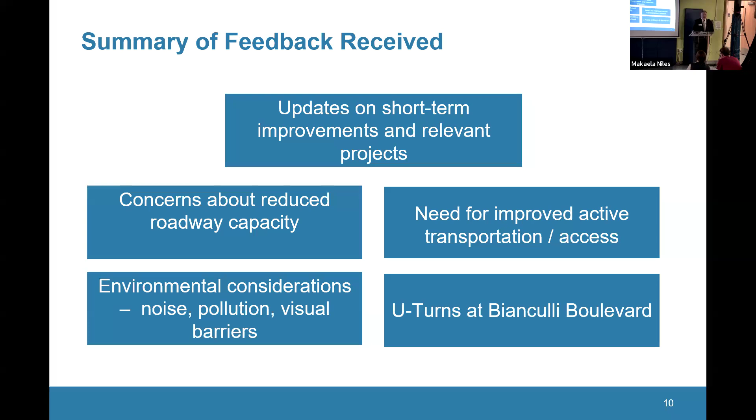So transitioning to setting the table for what our meeting today is going to be, and also how we're going to go from this meeting to the end of our process. For today's meeting, we're going to again talk a bit about short-term improvements and relevant projects, but primarily we're going to look at the initial alternatives analysis. We're calling it initial, preliminary—it's not complete, but we want to bring it to the public and commission members to present and hear feedback.

We also have environmental considerations in terms of the analysis. Then after this meeting, we have a follow-on meeting where we take feedback, complete our analysis, and bring back the final analysis. With that final analysis, we're able to look at what our findings are, potential recommendations, depending on how the remainder of the public process goes. And then our final step is to have some type of packaged final report, which can be submitted to the legislature per the commission's charge.

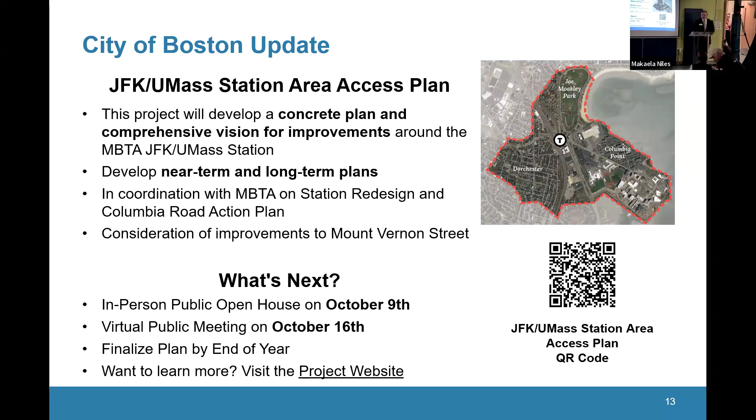The city is conducting this, and they have an open house October 9th, and a virtual public meeting on the 16th. We include these because we understand that while they're separate processes, they certainly need to be connected, coordinated, and ultimately as part of project development, all need to work together. So part of our study process is to track, keep track, coordinate, and document, so that as anything moves forward, all of these different relevant projects are in the same mix and can be done comprehensively.

So they're obviously, as we've been saying, in a project development process, and they're ahead of where we are. They have their own project development process, which is a required way to go and do things—go out to the public, certain design phases. So they do have steps they have to take. They are doing all this background work before they come to the public in general and speak to them. And the Beades Bridge is similar.

It is in a preliminary concept design phase, but unlike K Circle Columbia Road, we do include Beades in our concepts, and we are going to inform the Beades process in the future.

From the DCR side, some of this work was already underway, but some of it has been in response to public comments we've received, either by email or from people coming to the meetings.

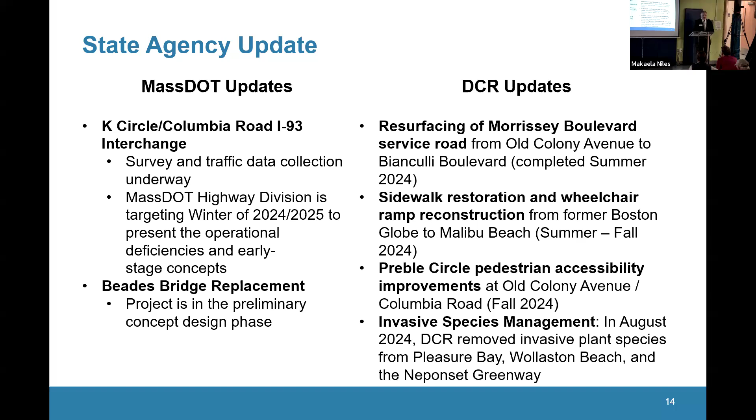We understand that a lot of our process here is going to take time, so we really try to identify immediate things that can be done, often in response to what we hear at these meetings. This is a very standard part of our process.

Now, this is another DCR project. They're looking at a pump station to prevent flooding on Morrissey from Conley to McKone to Market Place. There's an existing drainage outfall pipe, and this emergency pumping is required, so this pump station is going to help with flooding throughout the area. They'll look to complete it in 2024 and 2025, so this hopefully will do a lot for the flooding in the short and medium term.

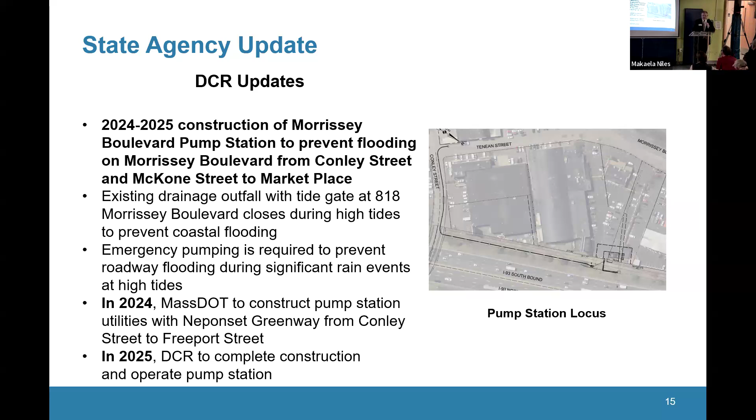Okay, so that was just an update on the immediate and relevant projects going on in the area. This next part of the presentation we're calling the corridor layouts. It's primarily based on our alternatives development process, but wrapped around it is the public involvement process we've been conducting from the beginning. So these layouts we've developed involve a study process, but also public feedback wrapped around it.

We had been showing in prior meetings the individualized locations, but this part of the presentation is going to be stitching together those locations into a more cohesive corridor. If you had seen them on the wall, that's what we are going to be showing again in pieces, because it's too long to show in an entire slide.

So here's our overview of the corridor very quickly. The intersections are obviously the ones we focus on from the beginning because they are the conflict points, the friction points, the turning movement points.

We developed a layout based on our process, but also feedback, that has one option for Neponset Circle. We have two options for Freeport Street, one for Bianculli, two for First Street, and one for Preble. That's not to say we didn't develop more alternatives - those are in the evaluation - but for putting together a layout like this, we wanted to pick and choose a few of them to be able to lay out the corridor in this way.

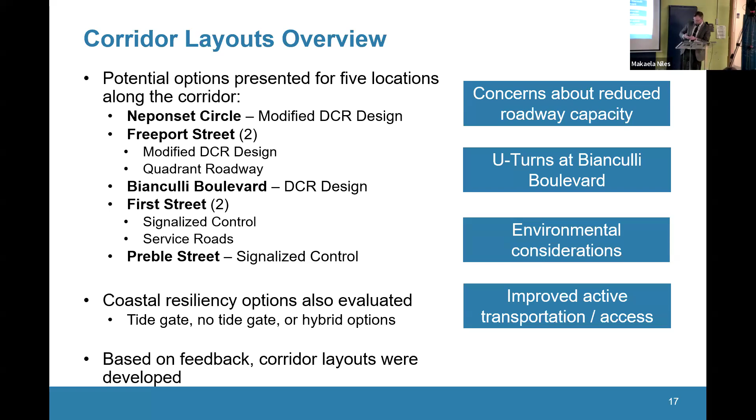Thanks, Ethan. Thanks, Ethan. We're going to start here. Sorry, Ethan, which way's forward?

We're going to start for once at the southern end of the corridor, recognizing the last couple times we've tried from the north and haven't gotten past Bianculli. So we wanted to start at Neponset, which is the southern terminus of the project area, a very complex intersection - it's really a combination of four or five or six. What we wanted to highlight here, you'll see an orange transparent rectangle.

Just to orient everyone, north's to the right, it's going to be to the right on this whole sequence of maps. On the left there, that's Neponset Avenue, and then Morrissey Boulevard continues off to the north towards our right.

So I want to draw your attention to that orange area. That orange area is a big contributor to the congestion Neponset Circle experiences, as well as crash incidences, due to the fact that it has so many different movements all coming together and weaving apart. I'll just step away from the mic for a second to illustrate some of those.

Get on the heavily traveled 93 northbound on-ramp. So we have people coming northbound from Neponset Avenue trying to get to the heavily traveled I-93 northbound on-ramp. At the same time, we have people coming from Quincy, Neponset, trying to get north on Morrissey Boulevard. It creates a real mess.

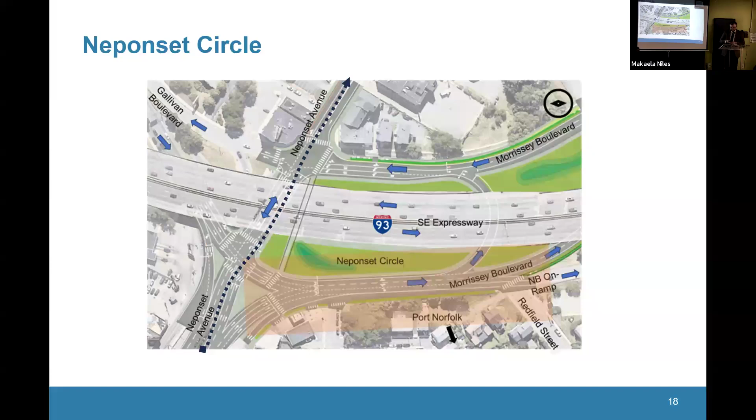Going to continue a little bit to the north. This is the segment essentially between Neponset Circle and Pope's Hill Circle.

First thing I'd like to draw attention to is the roadway here, and for folks more interested in detail, there are some typical sections. This is the first time we're really introducing the roadway reconfiguration, where we're proposing to reduce the number of through lanes on Morrissey Boulevard from 3 to 2, essentially throughout the corridor. As we head north from Neponset Circle, that's where we start to pick up that cross section.

We've identified a median area near the I-93 off-ramp as a really good opportunity for a stormwater detention infiltration facility. In this southern part of the corridor, the flooding we experience is actually more from stormwater flooding than sea level rise or water coming from the ocean. So the more we can do to delay the amount of water that gets to our stormwater infrastructure by letting it infiltrate, by having basins that hold it, the more it will help us in this urban corridor.

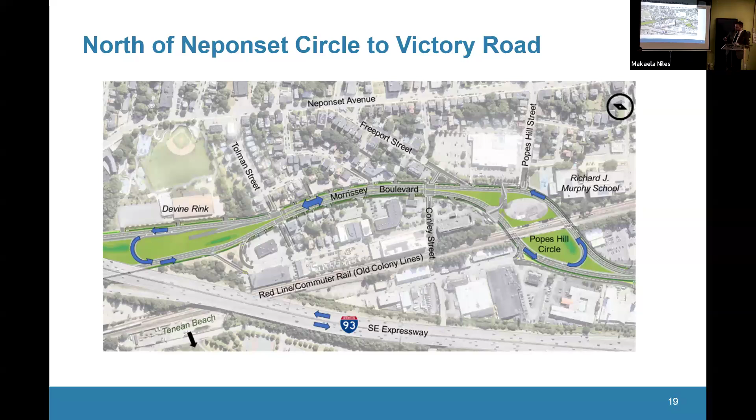As we continue to the north, I want to focus for a moment on this intersection complex at Victory Road and Freeport Street. As we're getting towards that I-93 bottleneck, we have a 93 off-ramp, another 93 off-ramp, and a 93 on-ramp. These destinations and attractors are bringing additional trips through this area, in addition to the geometric bottleneck we've got with the I-93 underpass. So it's a challenging situation.

There's a lot of traffic volumes to deal with. One of the ways we've talked about addressing this throughout the project is by simplifying these intersections. We're asking these intersections to do a lot by handling all the movements at one place. So our ideas at Freeport Street consolidate around reducing the number of movements.

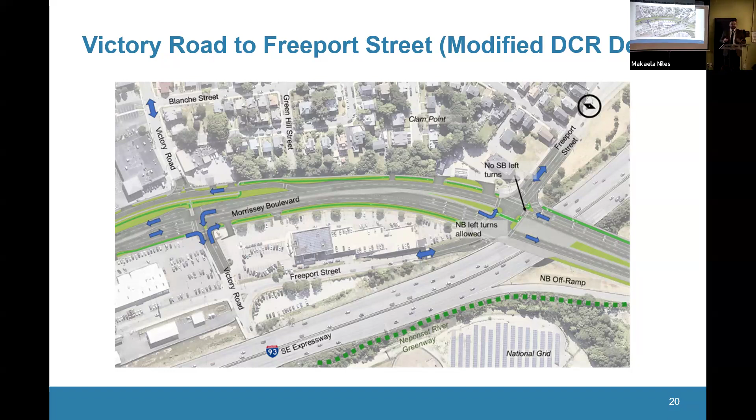The first alternative we looked at essentially moves southbound left turns down to Victory Road. By eliminating that one major movement and relocating it down the road, it enables that intersection to operate a lot more efficiently. We have a second alternative, depicted here, that adds on to that, called the quadrant roadway.

The difference here is, in addition to those southbound lefts being moved down, those northbound lefts are also moved to Victory Road, where they would then make a right and then a left on Freeport to continue through the intersection. So the quadrant roadway removes both of those left turns from the intersection.

We are still proceeding through some of the final steps of our VISSIM microsimulation analysis.

Based on those first meetings, we did decide to recommend eliminating the median U-turn alternative at this location. It occupied a lot more space, required a lot more impervious area, and I think some of the initial feedback we got was very negative to that effect.

As we consider how this Freeport intersection operates, we've also drawn our attention to the Victory Road intersection. There's a possibility to potentially eliminate this frontage road that currently acts to provide access to both Victory Road and the development plaza. We're looking at an alternative that could remove the service road, creating just one signalized intersection, so drivers would enter once to leave Morrissey Boulevard rather than having the frontage road with a series of right-in, right-out exits.

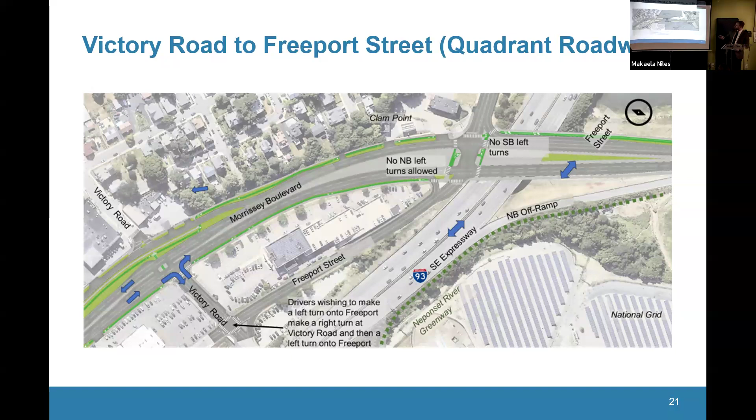Moving beyond 93 towards the important central section, you're probably thinking you haven't heard enough about coastal resilience yet. That's because in the southern section of the project, we've identified and coordinated with DCR, the city, and other important agencies and stakeholders to understand there are other projects responsible for protecting Dorchester and Morrissey Boulevard further south. But once we cross I-93, Morrissey Boulevard really is the first line of defense against coastal flooding and sea level rise. So that's our priority here.

We've identified essentially two primary decision points with a couple of different ramifications. The first is we can put a surge barrier on the Beades Bridge, basically a gate that we can close. If we elevate the Beades Bridge and raise Morrissey Boulevard, that would allow us to not raise or elevate parts of Malibu Beach around the back.

So what we could do is have a roadway profile that gets us as high as we need to be, but it could descend, which would help minimize construction costs and minimize construction duration. But it would leave you with a wall to your right as you headed north. We've developed three alternative profiles.

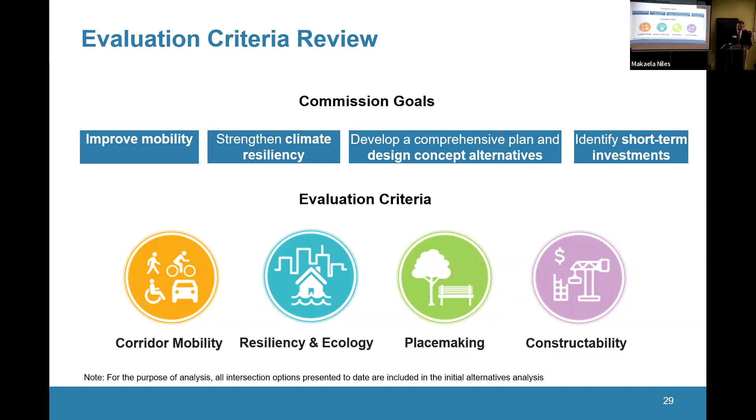So just transitioning to this slide here, these are what we commonly use for our evaluation criteria or metrics. It's just in a very bulleted form here, very succinct.

I have a bit more descriptors I'm going to rely on for some of these. For mobility, we look at delay at the intersection level, total hours of delay in the corridor, vehicle queuing, vehicle access to sites and entrances, and transit access—how easy it is to access certain points in the corridor for transit vehicles or those seeking to go to transit stations.

Pedestrian crossing comfort is pedestrian comfort at intersections generally, but there are also mid-block crossings in the corridor. Pedestrian gaps—we look to close any north, south, east, west gaps in the corridor. A way to look at bicycling is stress level, or level of comfort. The more bicyclists feel comfortable, the more they'll generally use it, so we have a measure of bicycle crossing stress.

Potential safety effects—we look at what types of treatments there are and whether there's an expectation of a safer environment. Resiliency and ecology—we want to look at impacts on environmental resources. I'll pause there because that's probably one of the more key aspects to getting a project done: environmental permitting.

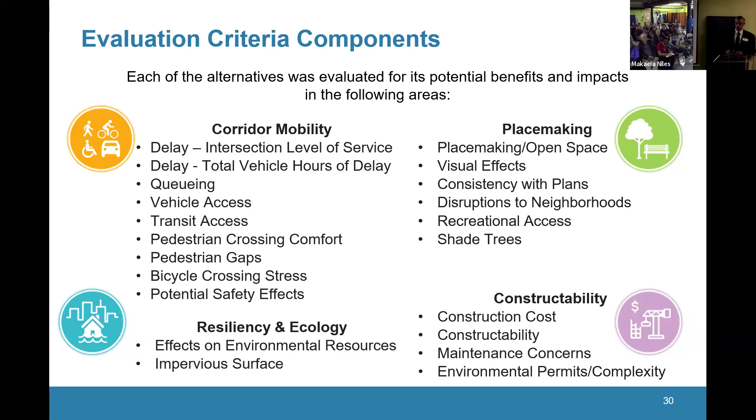But at this point, we're using this process, and we have the colored scale to give you a sense, a little bit more visual analysis in this case, to be able to understand where we are at with different alternatives at these locations.

And as we said before, for Neponset, we've already kind of decided based on the information we've collected and the work we've done. Also another key piece of this is public input—there may be things we need to look into more detail, or that folks in the neighborhood and community give us input, which is input we've gotten throughout the process. We take that, and you've seen some of the results of that and the work we've done since. So we'll continue to do that as we go through this process.

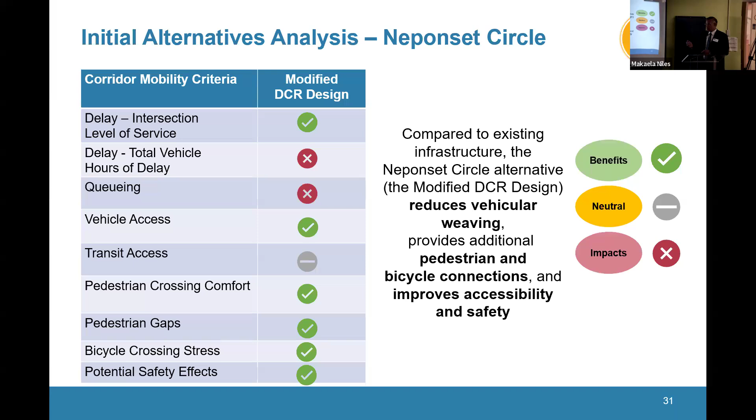Generally, for the mobility criteria, some are great, some are generally not as good. So that's how that rated.

In terms of some of these other criteria, the resiliency and ecology criteria—we aren't changing the impervious surface, actually we're reducing it a little bit. If there's anything at all we can hang our hats on, we're kind of going in that direction with it.

In terms of placemaking, in this case, this is a green check. This is a great opportunity. It really doesn't speak to the tremendous opportunity we have at this location to create much more of a human scale for the area under and around the infrastructure that's there.

Also the safety improvements from the steps we want to take there. That one really doesn't have much of a comparison.

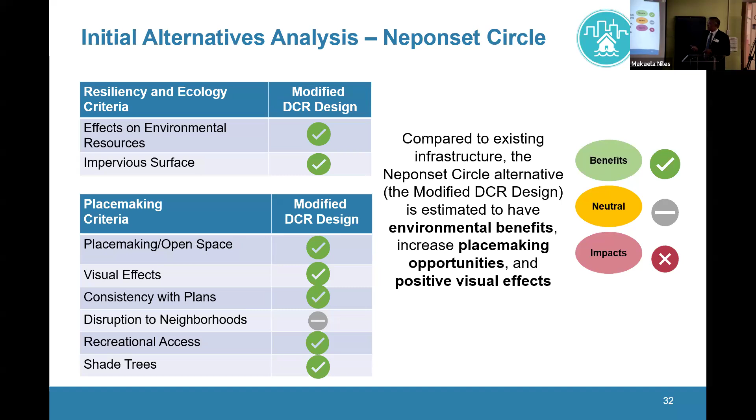The construction cost isn't huge because we are using mostly existing infrastructure, and constructability is the same kind of situation, because we really don't have a lot of disruption and we're not doing much. Maintenance is pretty much the same, and complexity is neutral because there are things we have to do and processes we have to go through, but basically it's not very significant because it's mostly the infrastructure that's already there.

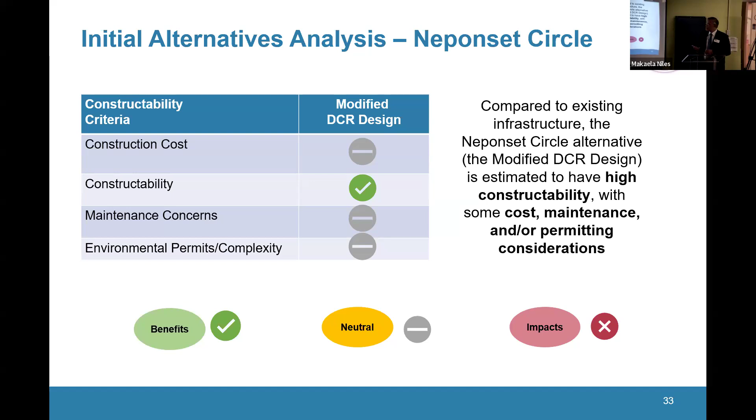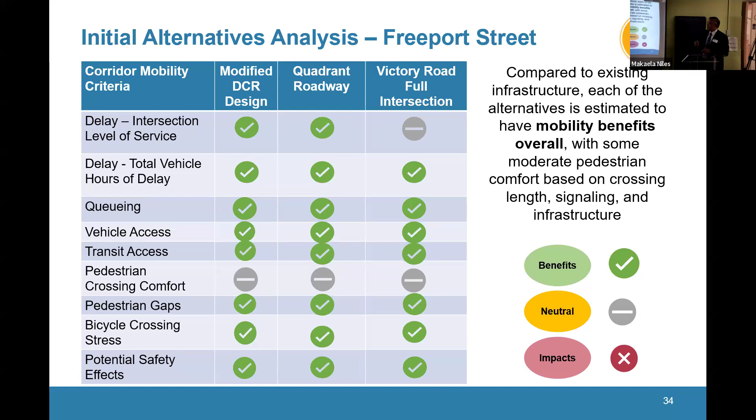Next, for Freeport Street, there wasn't a lot to really differentiate these too much in terms of mobility. You can see they rated pretty similarly, and it's a little unusual here because we don't have a lot of different components within this little piece of roadway. And we didn't have the other Victory option here yet.

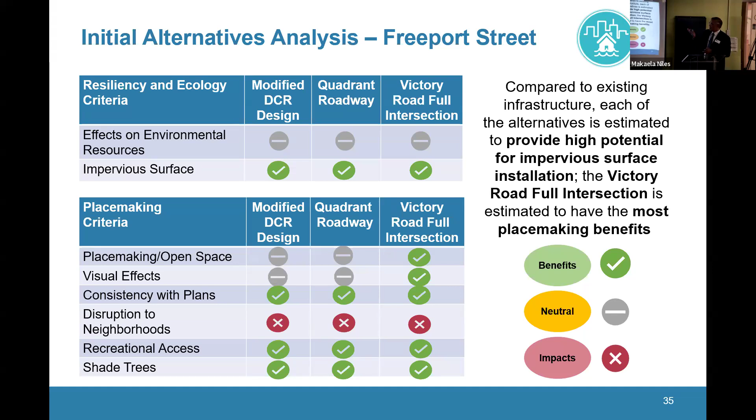But in terms of the resiliency, you can see how they are very similar. And in terms of placemaking criteria, Victory Road gives you a little bit more positive opportunity there, but for the most part they're pretty close in terms of the other two.

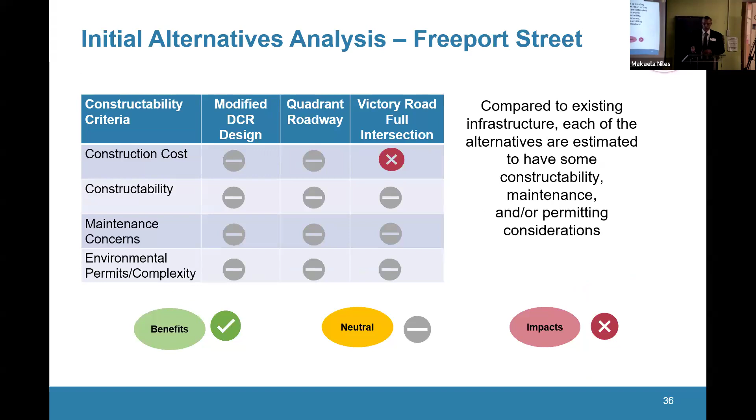And then constructability, obviously, because Victory Road full intersection completely disrupts the whole roadway, and we have to create a new intersection, whereas the others you're just realigning some of the infrastructure there. So that's obvious why that one would have the red X.

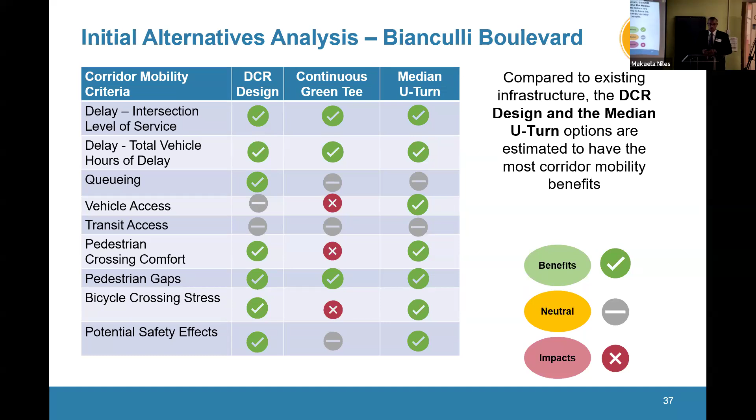In terms of Bianculli, we did have the different options here to show you comparison. But as you can see from our work here, we've already decided that the DCR design is probably the best in this situation. Here's the other criteria for resiliency and placemaking, all fairly similar in terms of the first two, but our analysis and the feedback and other things have led us to that one solution.

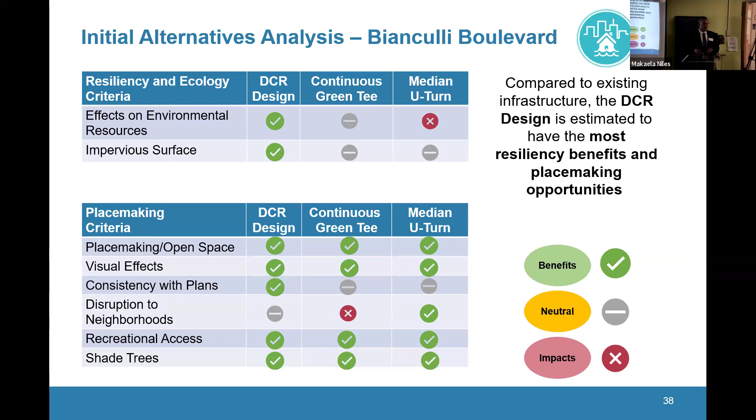So First Street, you saw there's different examples here. Obviously the big issue here with the difference between the two is signalized control. It's going to slow the traffic down - you have an intersection where you don't have one now. So the overall impact on the whole network is that you're going to have some negative impacts there, and that's reflected here.

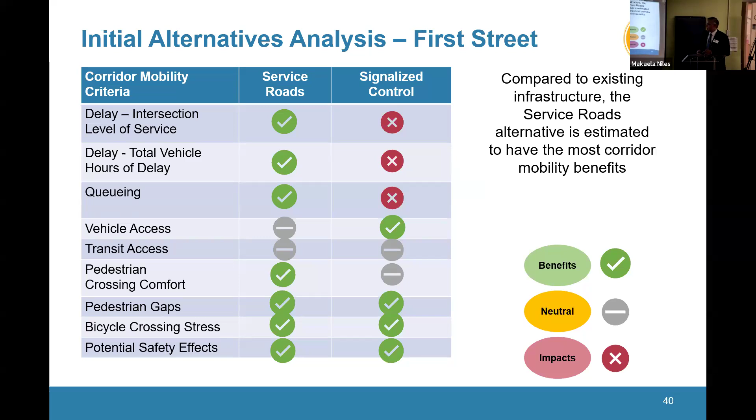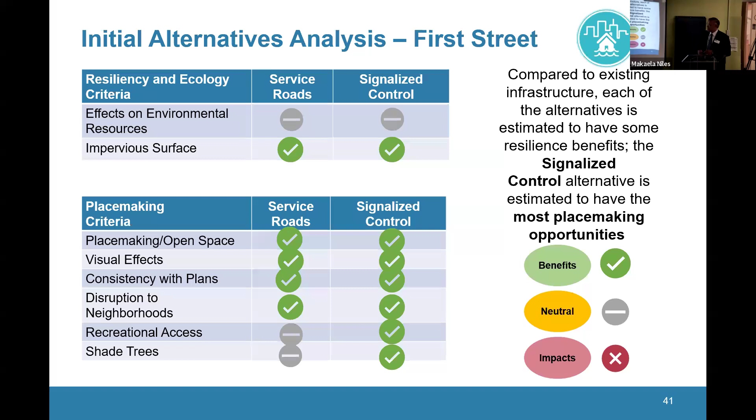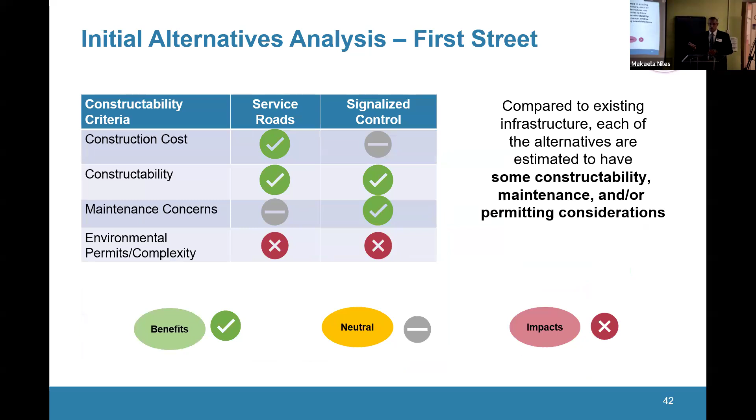Resiliency and ecology and placemaking generally, pretty close - there's nothing that really differentiates those significantly between each other. And then the constructability criteria, again, from environmental and permit complexity, there's a lot more construction, so it's going to rate out as well.

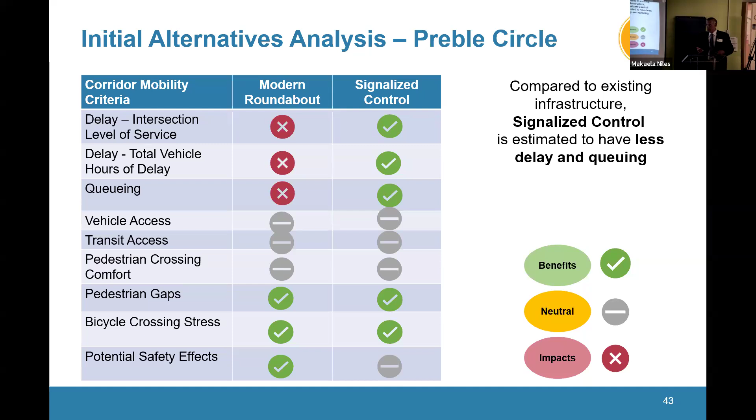Most of the other things rated about the same. But here on these two, you can see even though it's leaning towards the modern roundabout in some of these, we did, based on all the input and the technical analysis, lean towards the signalized control here.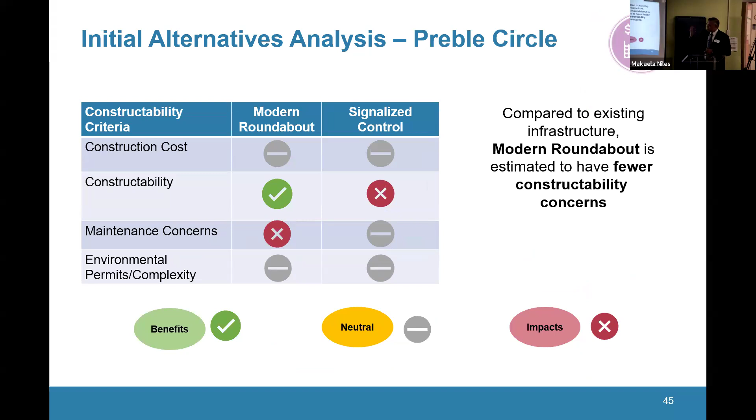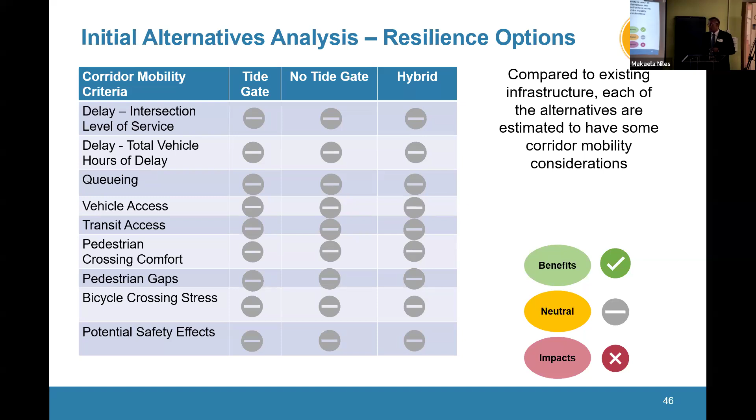And then constructability, here's our ratings, which, not a huge differentiation between the two. Resilience options, not a lot - I think Ethan talked about it a little bit, and it's not a lot driving you in this analysis here. They all kind of rate the same.

So I think we really need to dive more into it, get feedback on, think about how we're going to implement it, and the different options. It's hard to really understand what we're talking about, but basically, as Ethan said before, we're talking about different levels of the roadway and protection on both sides that may impact Malibu Beach, and it may impact constructability and cost savings. So those are the things that kind of might drive that more than anything.

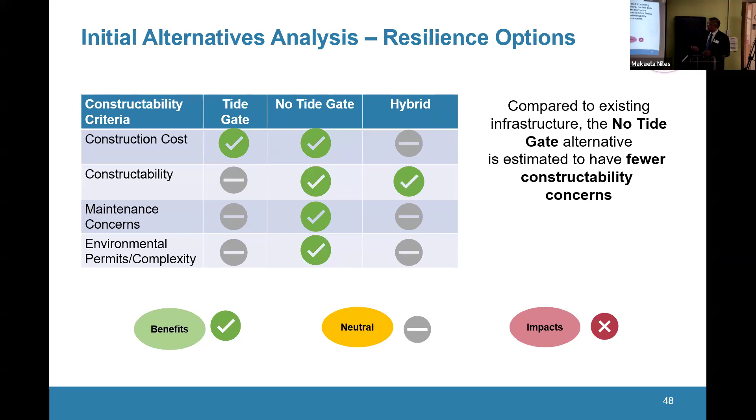But with that, that's just a really quick rundown - a lot of information and work went into that. I hope that was helpful. Again, we can talk about it more if there's any specific area you want to dive into, but I'm going to turn it over to Ethan, who's going to talk about the traffic analysis or the transportation modeling piece, which will be done for the whole corridor when we do decide what our recommendation will look like.

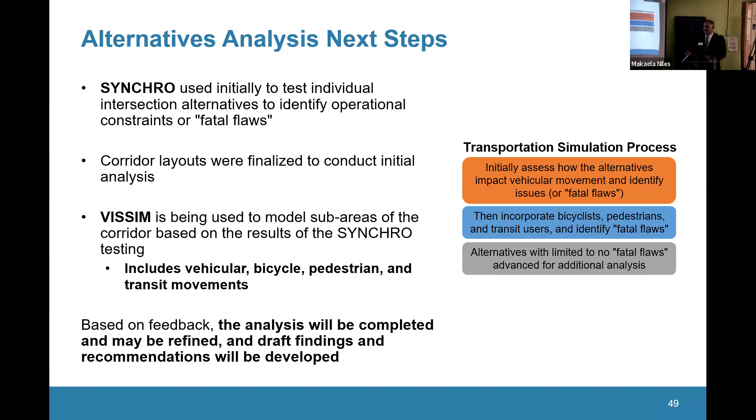This is the DCR design that we have shown, and this is the operation.

Both of these are, in theory, the year 2050. That's not to say when a project ties to that — we look at a horizon year out a certain time to make sure we incorporate future demographics, so any improvements we make actually last a certain amount of time. So this future scenario incorporates both future demographic and volume changes, but also the cross-section change on Morrissey.

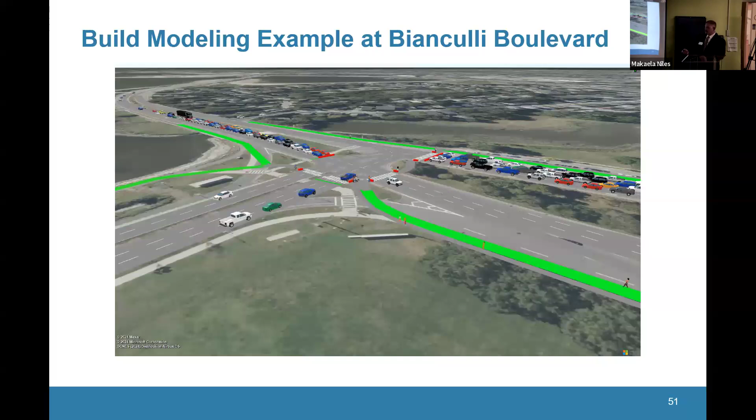So this was just meant to give a bit of a preview of what our next meeting will hold. We've been saying we're going to have some visual simulations, so I just wanted to show ultimately what we're going to present at our next meeting. We're going to open it up to commission discussion. Thank you, Ethan — sorry, but this is just the...

Yeah, I can read that slide. Any discussion from commission members? If so, raise your hand or just turn your mic on.

I'll have one question. Can we assume that throughout, you broke it up into 5 different sections, right? Most of them, with a couple having 2 options. Correct — we can assume there's a mix and match here, where there isn't one option that will prohibit the next from being done. It can be that in this section we want this one, in that section we want another, and it will all continuously work, correct? Generally, yeah, there are some that are tied to each other — for example, First Street, Victory Road and Freeport, that one is somewhat tied, but there is interchangeability. Okay, great, good.

The only other question I have — this is a lot, right? I've got to think about this more, and even for the community, there's a lot more we've got to look at, and next time we're on it, we've got to think about what it would feel like and look like for us when we're driving through.

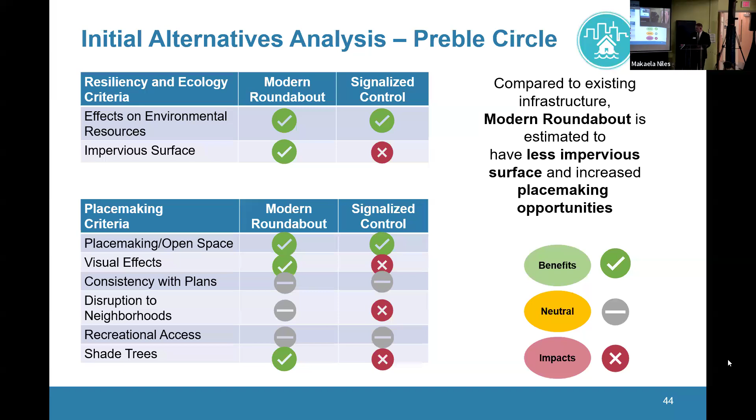Quickly, thank you. Ethan, is it possible we could go back to slide 22? And could I borrow your point? Assume we'll be sticking around towards the layout slides.

Okay, so zone 2 in the whole alignment, most pressing climate resilience portion. Could you identify yourself too, if you haven't? Yeah sure, I'm John Rich, I'm a Savin Hill resident. Thank you.

Is it possible I could borrow your laser pointer? Sure. Thank you. That green line right there. The lower one? Okay.

So, also, I commend all the work that's being done. It's a big project. One thing about this area, Savin Hill Cove and Dorchester Bay Basin, and not in the slide is Patten's Cove, but they're all related.

One of the things that comes up in many of the slides is ecological and environmental issues. We've talked about the berm in this area, and the charts over there behind Jay. One of the alternatives, you'll see the elevation rise up there is like 11 feet 2 inches above existing. That's really, previously it was projected 7 to 8 feet for a 100-year storm and sea level rise 2070 conditions.

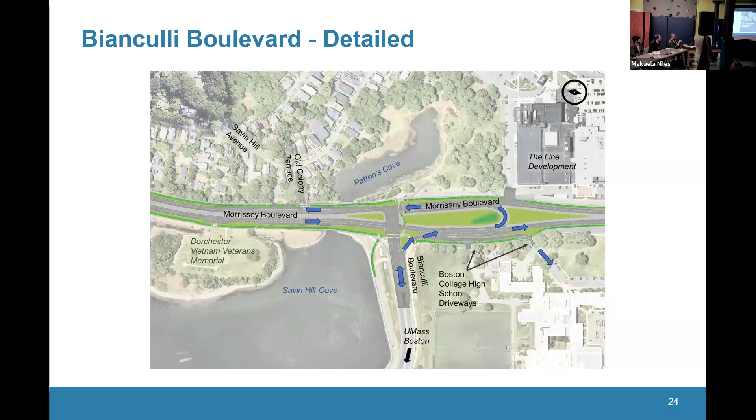So by providing the deceleration lane and then providing, I believe there is a signal there. Mike, correct me if I'm wrong. Is that signal for walking? Is there going to be a red light signal for traffic, like permanently installed there now? Yes, there will be a signal there. So, Mike with Howard Stein Hudson, this is the project team. There will be a signal there, there'll be a crosswalk, there'll be left turns out into the yacht club, southbound U-turn.

So it will be a U-turn, because it looks like it doesn't go completely around in the pictures. They would be permitted, we trimmed it back. This is Casey Harden from the design team. Looking at the design vehicles, we're able to keep it because the geometry is a little unique. You get some extra space to make the turn because of the extra lanes and the offset in the median.

So it just looks a little smaller there than it used to when it was further north, just because of geometry. Okay, so it will be a permanent traffic signal going northbound? Correct. It won't be red very often going northbound. It'll only be cued by the detection when there's someone waiting to make that U-turn or turn. And frankly, those people will probably wait a minute or two. That's why we have that left turn pocket outside the travel lane, so you're not sitting there staring in your rearview mirror.

And I did notice that there is now a pullout onto Morrissey Boulevard from Old Colony Terrace. Thank you very much for listening to us about that. People pulling out will be able to go into that U-turn to make the northbound turn. There won't, it's far enough away. There's not going to be an official barrier against it. I think 9 times out of 10, people probably won't try it. If traffic's moving at speed, it'll be difficult to make the maneuver just physically.

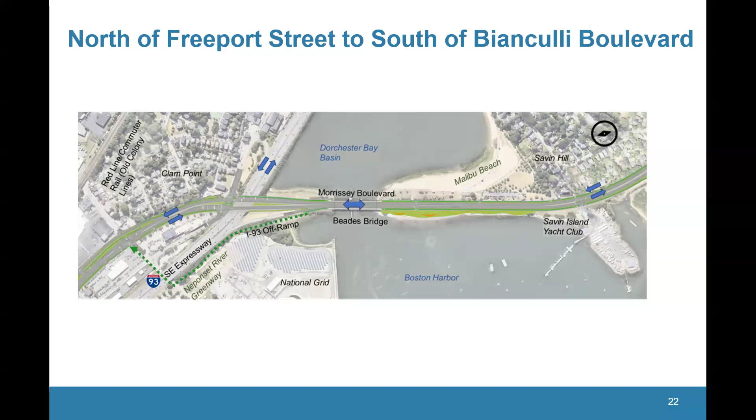Let me see, is there anything else I wanted to say? Again, I'm worried about emergency vehicles getting into our neighborhood. And also, if you insist on doing all this, which is basically overkill, would you please put in an exit and entrance at Conley Street so that the people in Port Norfolk can get in and out? Thank you.

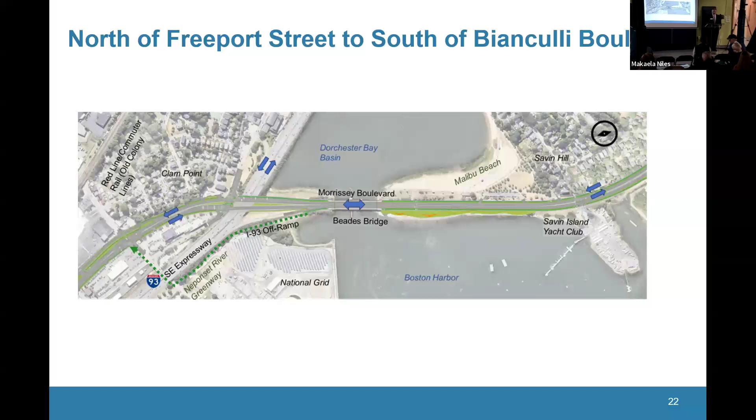This is Selena, neighbor. So throughout this whole project, the point is to reduce traffic, make this smoother, increase pedestrian safety, and increase use of the MBTA.

First Street has two dead ends. One goes into a quote-unquote future development - I don't know who got their back scratched to create that road there, but there's no development there, so I don't know why there's a road planned. The second one goes into BC High, which is also not a road. So why do we even need a First Street?

In our last meeting, I believe it was Frank who called in and said the problem is we need to make more connections through this community, this school that we're in, because we're separated by 93 and there's no access to Star Market or the parks or the beaches from this part of Dorchester. Why aren't we planning for the current connections instead of planning for a future connection, which from years ago, when this development was planned, was said to be a commuter development right next to JFK? The reason for it was everyone was going to be commuting. Now we're putting in 4 car lanes and 4 bike lanes, and creating access to a development that is currently not there. Do we really need those 2 extra sections of First Street?

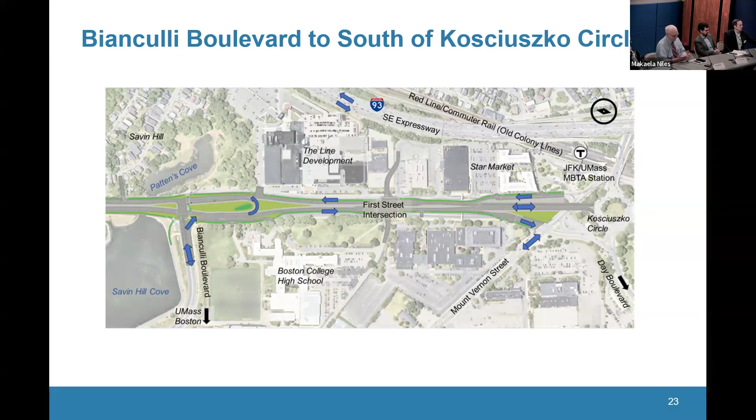Okay, but they do that, we don't do that. But there are plans that have First Street as a future plan, part of this community, that because we are planning for Morrissey, we have to take into account.

So I just want to clarify though, MassDOT chairs the commission, right? Yep. So as the chair of the commission, I don't think it's so easy to separate MassDOT from the commission.

No, again, the point I'm trying to stress is - I don't think, maybe I'm wrong, but I don't think anybody thinks MassDOT should come into Dorchester and plan comprehensive development in Dorchester. That's not our role, that's not what we're good at. I don't think that would be taken well. That is the city's responsibility, and I think the city does it really well.

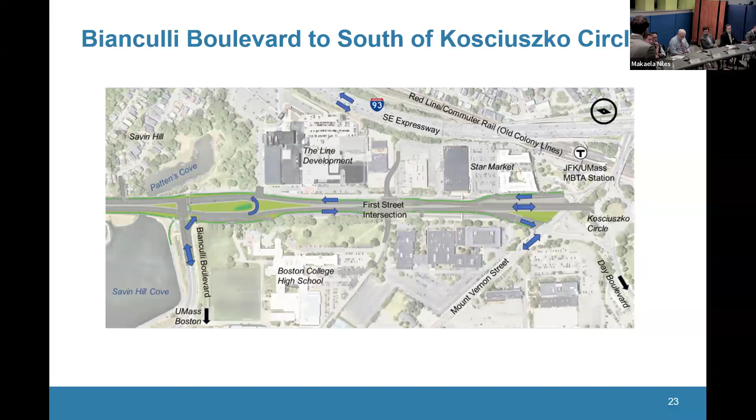But we take what the city has done and are doing and meld them into our plan. So I agree it's not for Dorchester, but in the law that created the commission, MassDOT, as the chair of the commission, is tasked with creating a comprehensive plan for the Morrissey corridor, which is what we're talking about now, and includes First Street. So it's unfortunate, but there haven't been other presentations from other parts of the commission because MassDOT, I don't think, has encouraged it. I don't know why, but it doesn't meet the comprehensive planning nature of what's asked for in the law, and what really Selena's getting at here.

And sort of, right - we also wait, sorry, so I need help from the city now. Yeah, okay, no, wait.

I really need you guys to step up here, because if the city is on this commission, MassDOT would never come in and tell the city that their plans are wrong. If the community wants to tell the city their plans are wrong, that's between you guys. We would never come in here and tell the city their plans are wrong. We take what the city has done and make our plans accommodate it. We're not going to overrule the city's local planning. They've done their local planning. They have a plan that says First Street is going to be a future connection. We have to take that into account.

Jim Fitzgerald with the planning department. Just to clarify, I think it's a timing problem, and we should be showing that graphic with the future context of the Dorchester Bay City site plan. Say Morrissey Boulevard gets constructed in 5 years, and if Dorchester Bay City's project hasn't advanced enough to build that street, it will have to be something built by them later. So it's a bit of a timing problem, and it's also hard to visualize, going into existing conditions that don't make sense today with this plan. That's probably something we need to make clear. I know it's showing it probably not in the exact right location, but it's meant to be where Dorchester Bay City anticipates building First Street from Morrissey out to Mount Vernon. That's a critical part of that development plan. I hope that clarifies.